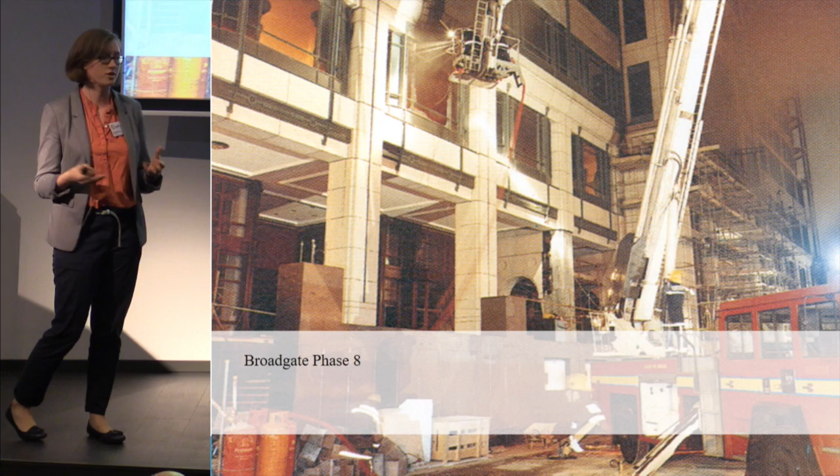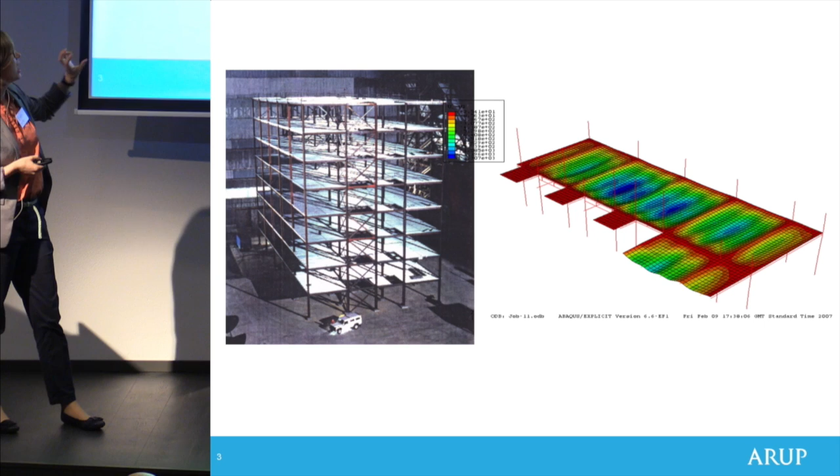That culminated in the Cardington full-scale fire tests, an eight-story steel frame building which they set alight, and used that to actually validate the numerical models and all of the design tools that we have for structural fire research. So when we're doing these very complex models, we've got confidence in them because we've actually done full-scale fire tests to validate that behaviour.

Now, less than a decade later, we realised that there are some really significant inherent weaknesses in the performance of steel structures in fire as well. It's very well with structural fire engineering research to talk about how much stronger things are in fire, but we also need to be mindful of how they can be weaker.

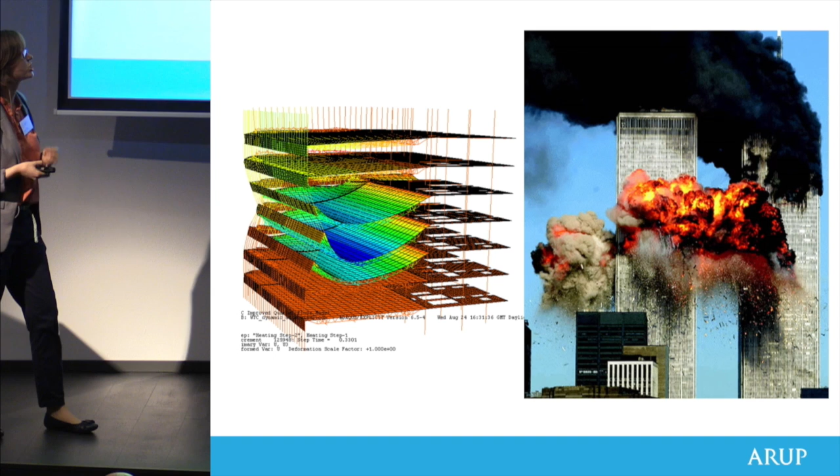A lot of the forensic research done by NIST and other academic institutions really spelt out how vulnerable our tall buildings are if we've got a multi-story fire. As Sean was saying earlier, the thing that stops us from having a multi-story fire is the fire stopping, the quality of our compartmentation construction.

So how much can we rely on that if we're talking about the stability of a tall building in a city centre location? We need to be very sure. There are some buildings that should just never collapse in fire, so when we're doing that design, that's something we need to think about.

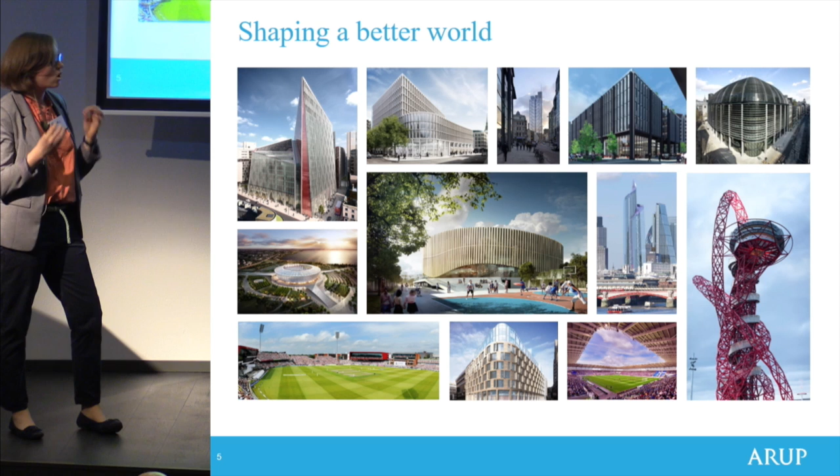The last 20 years has seen a huge amount of research in the very detailed analysis of steel structures, concrete also, and their response to fire. That has given us the ability to design some very complex structures for fire.

But Professor Andy Buchanan probably said it best when he talked about having a consistent level of crudeness. We've developed all this great knowledge about how structures behave in fire, but we're still just using the standard fire to represent the fire hazard. When we're looking at designing a structure for fire, obviously the fire is the single biggest constraint, the major input.

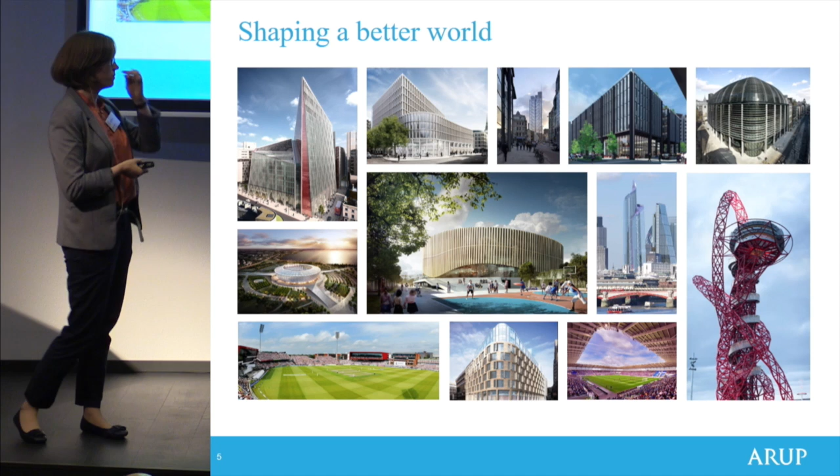So any of our conclusions about how the structure is going to perform are purely based on and limited by the assumptions we make about the design fire. And so we need to develop that knowledge.

A fire, as you're all going to be very familiar with, is a function of the space that it occupies. I think what Sean captured really nicely in his presentation is that these spaces are changing radically. When we started doing fire research in the 1900s, the rooms and spaces we were testing were very different. The acoustic design of buildings and building physics design is becoming much, much better. You can have an open plan 8,000 square meter office, and acoustically that works. So is fire safety going to be the barrier to people building those sorts of things?

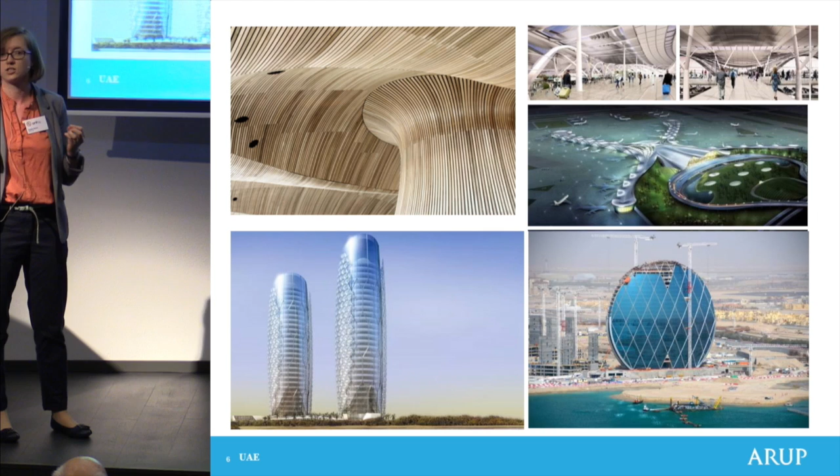We've got much, much bigger spaces. We've got very highly insulating facades. So not only does that pose a risk in terms of fire spread within the building, but how is that going to affect the fire growth? The growth rates that we're assuming for a structural analysis, is that actually the same? I think we'll find that they're actually quite different.

This is obviously the major input to our structural fire analysis. All of this is going to change the way fires behave, and we need to be able to quantify that. So the two challenges we have are about identifying what kind of fire we might have in the building. Is it going to be more like a parametric fire, a travelling fire, an external fire? And then also, crucially, how severe a fire we need to pick. That's probably one of the big challenges for design fires and structural analysis.

In my presentation today, I'm going to talk generally about building fire behaviour and what tools we have as structural fire engineers to characterise that. Then I'll talk about fire severity, how we choose those design fires, and then just a tiny bit about structural response.

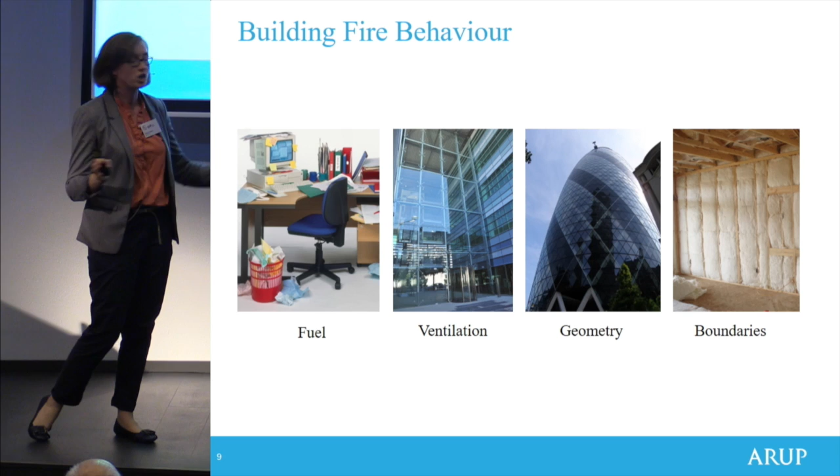So we're mostly talking about fire today. You're all probably very aware of how fires behave, but when we're thinking about it from the structural fire point of view, really we've got four principal parameters: how much fuel we've got, what's the ventilation, the volume and shape of the space, and how insulating our boundaries are.

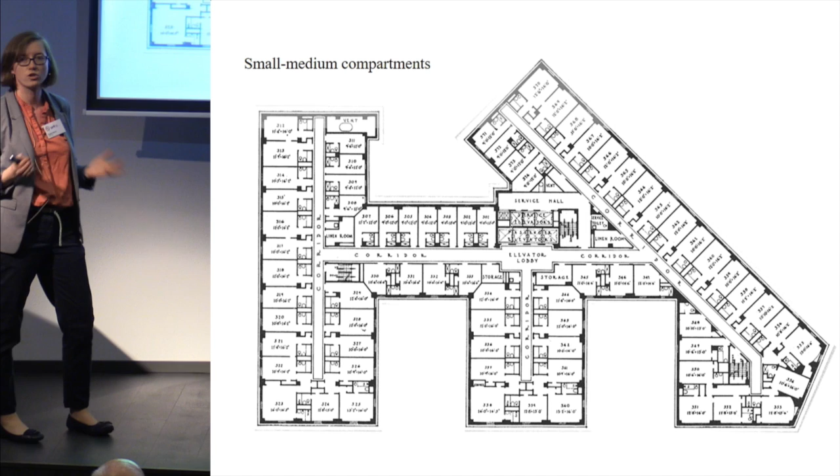If we look at the traditional model, we've got very small to medium-sized compartments, nothing bigger than, say, maybe 150 square meters. These are relatively well understood fires. We've got lots of data about how these burn. We know how varying the ventilation will affect it. We do know that we'll get variation of temperatures within the room, but these aren't really significant for a structure.

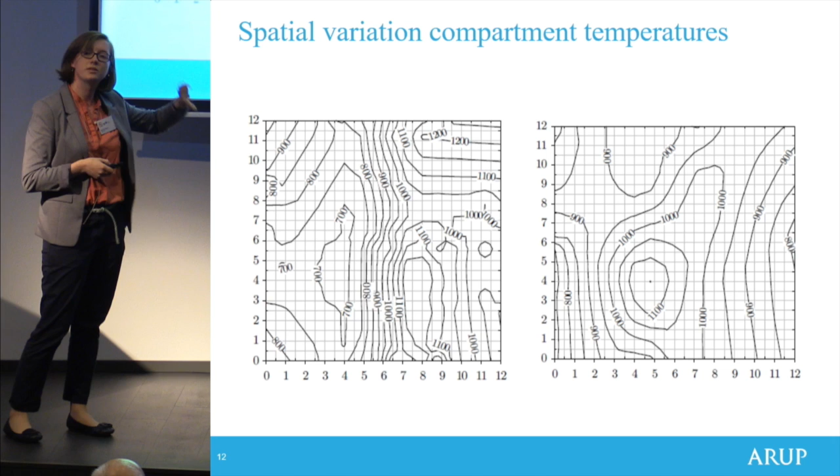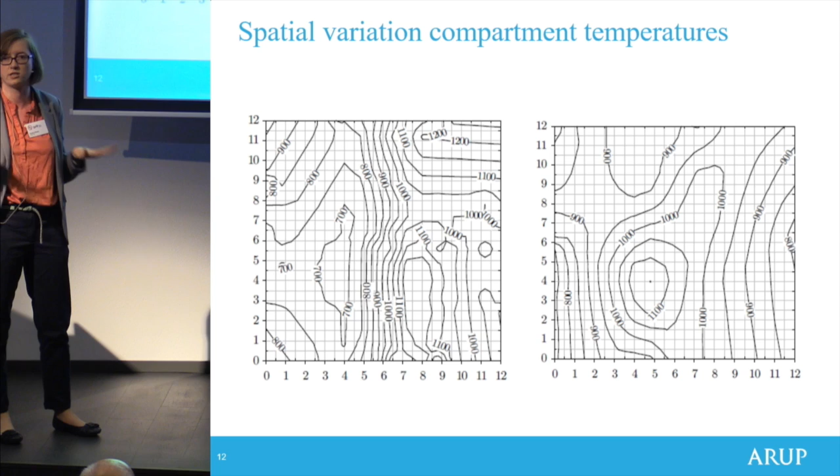If a fire is changing and evolving in matters of seconds and minutes, the structure is much, much slower than that. If the temperature starts to vary by a few hundred degrees over the course of a few minutes or seconds, your steel or concrete structure is just too slow—it's not seeing that variation. So we're able to use a simplifying assumption: a single temperature within the compartment, and that's reasonable. We know how varying the fuel, ventilation, and geometry changes things.

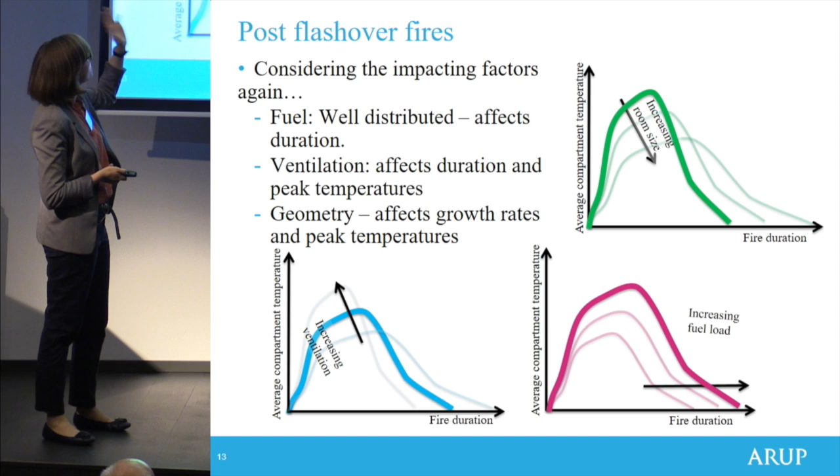We have lots of tools to calculate how that changes the growth rate and duration of the fire, though there are questions around how we determine what those actually are for our building. These models have been developing for a while—we have parametric fires now within the Eurocode, but they're obviously a function of the person who created them.

The fuel load—we probably have quite reasonably good data about what kind of fuel loads we have in our buildings. But how do we define the ventilation? When people present their different parametric fires, they're making assumptions about how much window breakage they're going to have. If we've got a triple glazed facade, how confident are we about how long modern glazing is actually going to last in a fire? We know ventilation is one of the most sensitive parameters. It's actually very difficult as an engineer, and there isn't really any guidance saying you should consider this amount of breakage. So it's very complicated, and people sort of wrap themselves up in knots over that.

And these have all been validated in test compartments up to 150 square meters. If you look in the Eurocode, there is a limit on using this.

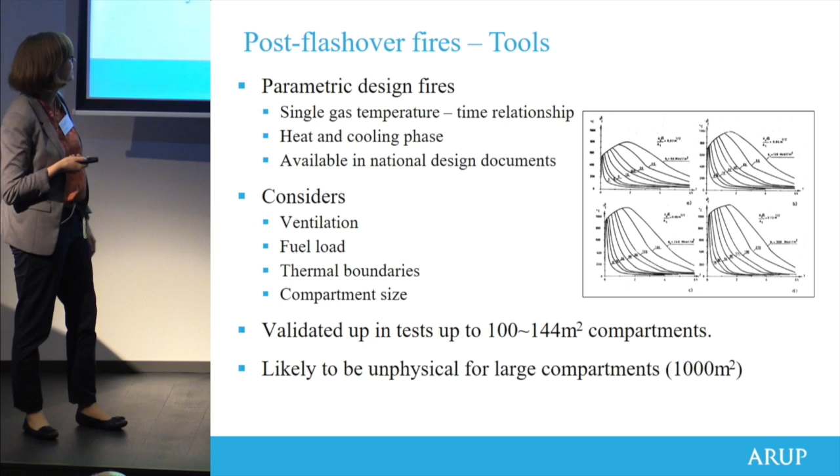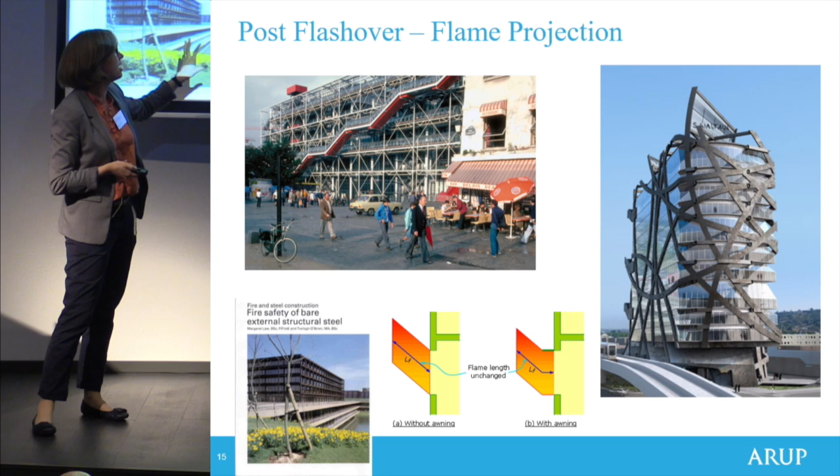Still thinking about flashover compartments, we've got flame projection. A lot of structures like to express the structure, so they want it on the external of the building. This harks back to the Pompidou. When Margaret Law developed her method for the Pompidou, she based it purely on the physics, the compartment fire dynamics. We still use that method today because the physics haven't really changed. It probably needs to be tweaked, but we can make reasonably accurate predictions of the flame projections for a fire within a compartment.

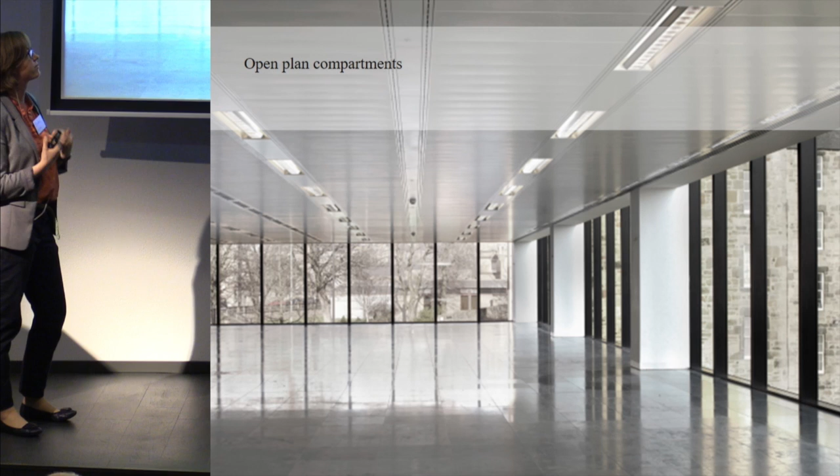When we get to open plan compartments, this is what at ARUP we deal with a lot in terms of commercial buildings. We've got very large open plan floors. Tenants in buildings want interconnected floors; they don't want any separation between them. So we've got this idea of creating vertical villages where you'll have a couple of floors within a multi-story building, and those will all be completely open to each other. Acoustically they can make this work, and from a building comfort level they can make this work, but how's that going to happen in a fire?

We've clearly got a risk of multi-story fires. This probably wasn't a surprise to people, but after the World Trade Center, it was helped by the forensic analyses done about what we call - I'm sure there's lots of different terms for it - travelling fires. So we've got a really large floor plate. What you're more likely to get is just areas burning. You'll have a patch of the floor that's on fire, and then that moves around the floor plate, dictated by where the fuel is and how much ventilation it's getting.

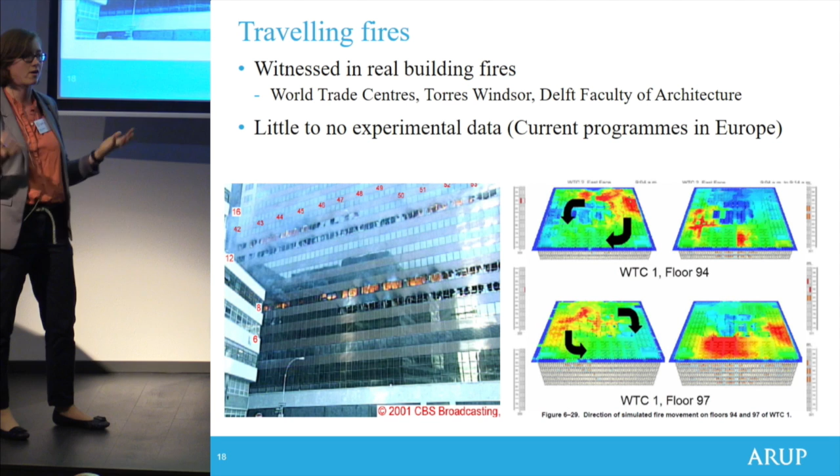From a structural fire point of view, these had always been ignored. Everyone knew that's probably what would happen if you had a really big compartment. But the thought was the temperatures would be much lower, so clearly the standard fire and a parametric fire are much more severe for the structure. So as long as we're designing to those, we're safe. What we saw with World Trade Center and other large building fires is that these fires can go on for hours, like 10, 14 hours. All of a sudden people started to think maybe they can be. That's a lot of preheating to put into your structure. One thing we know about, for example, with concrete structures is that they're much more susceptible to longer, slower fires where there's time for the concrete to heat up. You actually get higher temperatures in the concrete structure in a longer, cooler fire. These are subtleties that start to come out when you have a better understanding of how the structure responds.

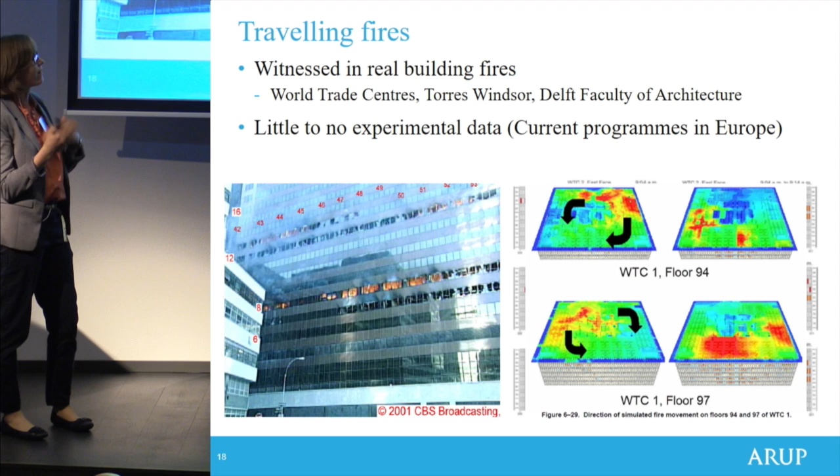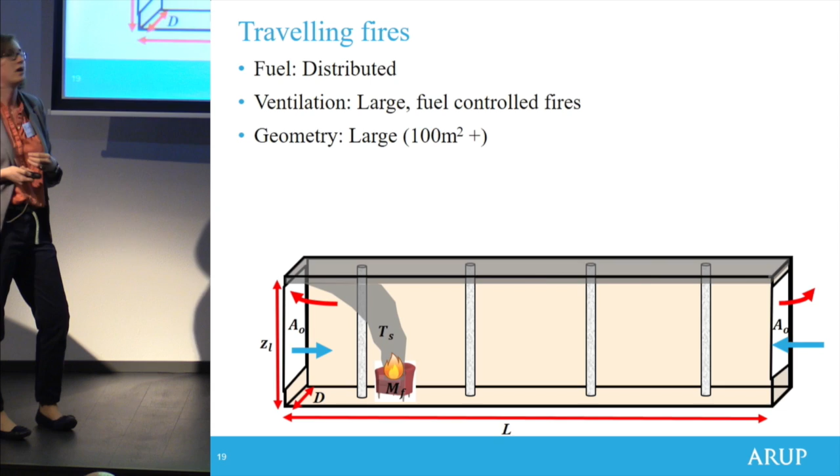So at ARUP we've actually funded some research into how we can go about characterizing this. The way that fire is behaving is very complex - it's a complex fire dynamics problem. But when we think about it from the structural fire side, we're thinking, what are we worried about? We're worried about how long it might heat, probably the main thing. So we developed a very simple model that used Alpert's correlation, where we have our near field, our burning area, and then our far field, our smoke temperature remote from the fire. We move this around the floor to generate that preheating.

Now this is very early stage. There's lots more work that needs to be done in this field. It's a very simple model, but at least it helps us start to get a grasp of how susceptible the structure is to this kind of heating. So if I've got a few hours of cool smoke temperatures, still at 300-400 degrees, and then a pulse of heating as the fire goes past that spot.

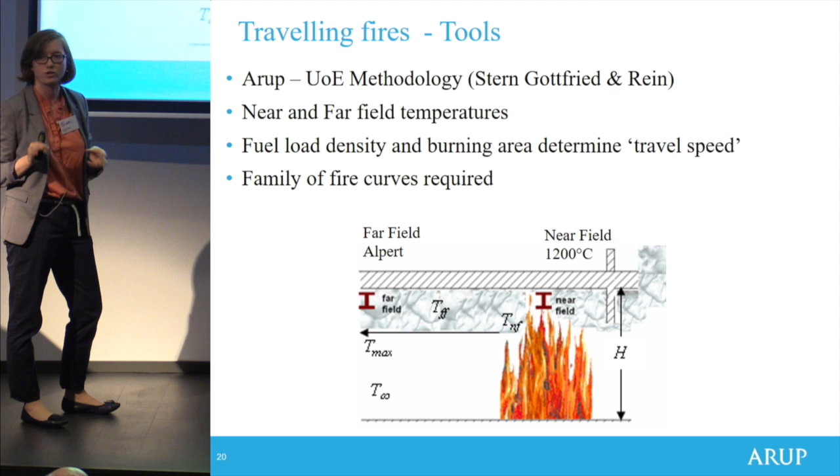And it requires a family of curves. You can't come up with one fire. I think that's the thing we're starting to move away from, trying to define the fire. What we need to be designing our structure to is a family of fires and different types of heating.

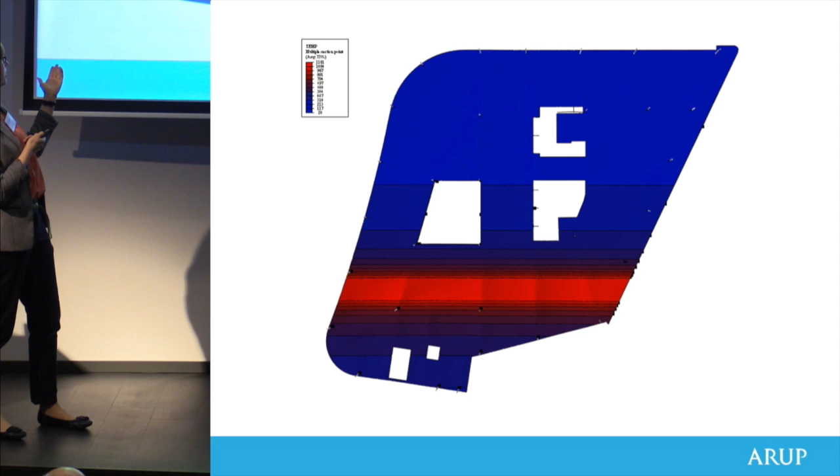And pushing and pulling it to make sure it's resisting all those different heating regimes. So this is just a quick example of how we would put that into a numerical analysis. It's very simple, but at least a start on how that can respond.

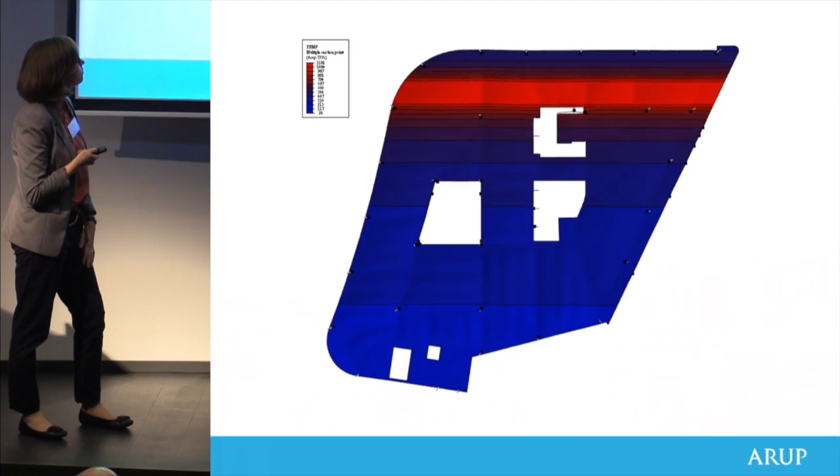Then we get into very large compartments, so transit halls, generally infrastructure types of facilities. We know it's actually very difficult to generate flashover there. We've got isolated fuel sources and very large spaces, so it's hard to create conditions where you might get a flashover fire. But we also have very long-spanning structures, so if I was a structural engineer designing this, I'd have to do a lot of robustness analysis just to make sure the risk of failure isn't a risk for safety.

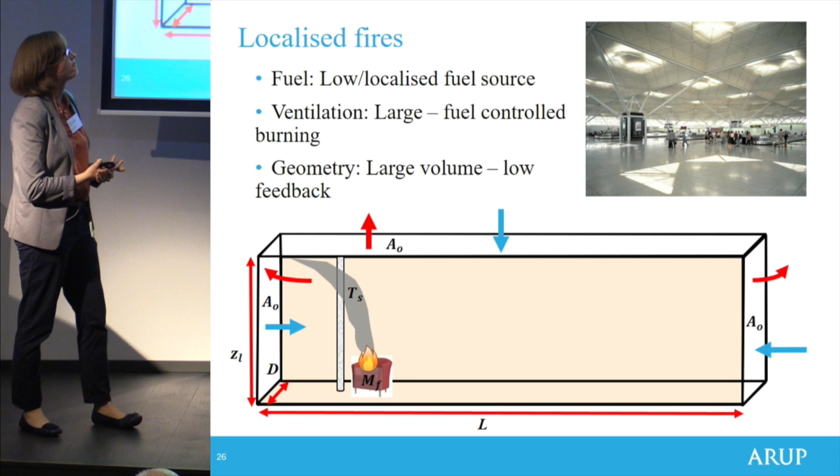And we can do similar things with the fire. So what we might end up doing is saying we don't actually need an awful lot of fire protection because the structure is remote from the fire, but locally to where we have a fire, we can apply fire protection and make sure it's not vulnerable to that.

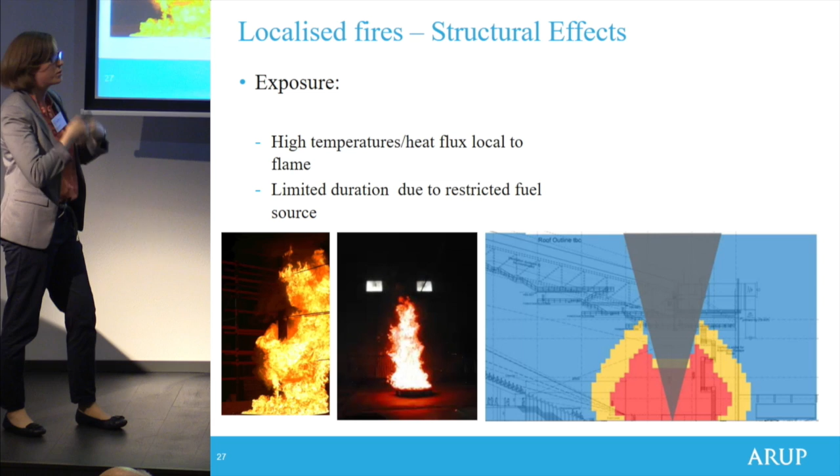So this is just an overview of localized fires. You've got very high temperatures local to the structure, you've got radiation to the structure, so that's what we also need to look at. But the smoke temperatures tend to be much, much lower and not significant for the structure.

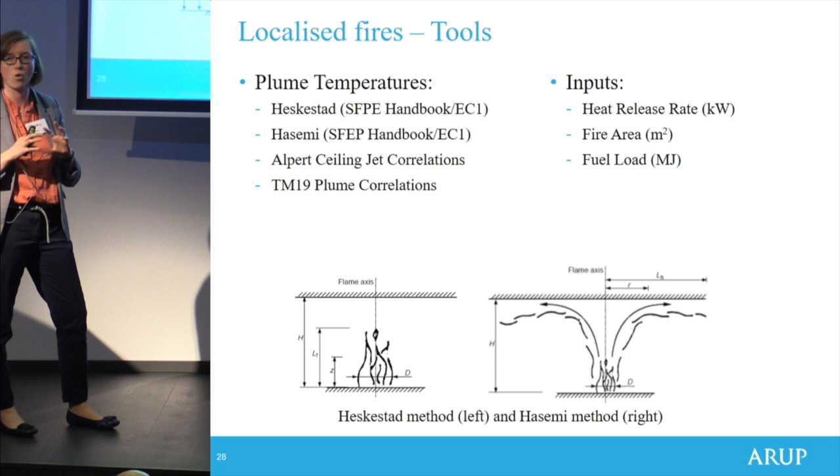And we have design tools within the Eurocode. There's quite a few correlations for free burning fires, as we'd call them. You simply correlate them to heat release rate, fire area and fire load.

So that all sounds very simple, but when you go to actually define what it might be, if it's an entertainment arena, it's very difficult because they want it to be a very flexible space, so it's hard to define what the fire load is. And sometimes getting fire data for the kinds of things you know are going to be in there is difficult too.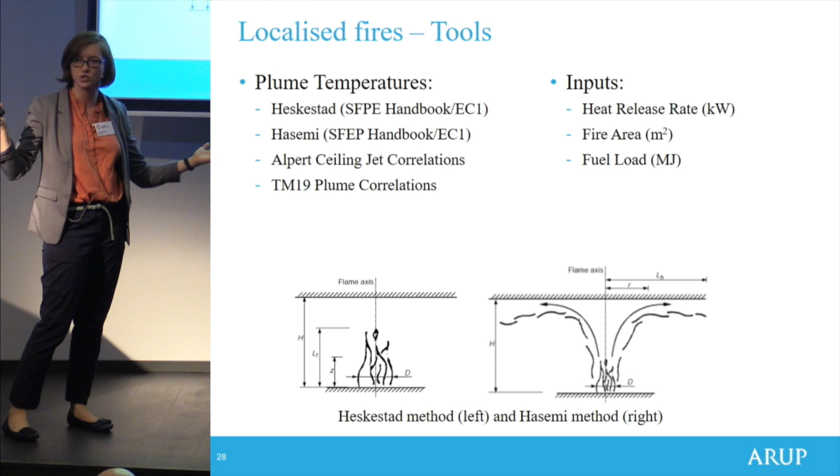So if we were looking at a stadium, we might have those large projection screens. Not many people have burnt those, so we don't really know the heat release data for them. We're trying to make estimates from things that we have burned, but generally people only let you burn old cars and things like that. So we need to think about that as well.

And then combustible construction. Everything I have just said is about non-combustible construction. So all of the data we have about parametric fires, about travelling fires, that's all based on structure that is not contributing to the potential fuel load for the fire.

For timber structures, we know we're able to define what the charring rates are, but those are all based on furnace tests, and how that would actually be replicated in a real building, nobody really is sure. Because we've always built timber in lower rise construction, it's perhaps less critical for structural stability, though that's still an issue.

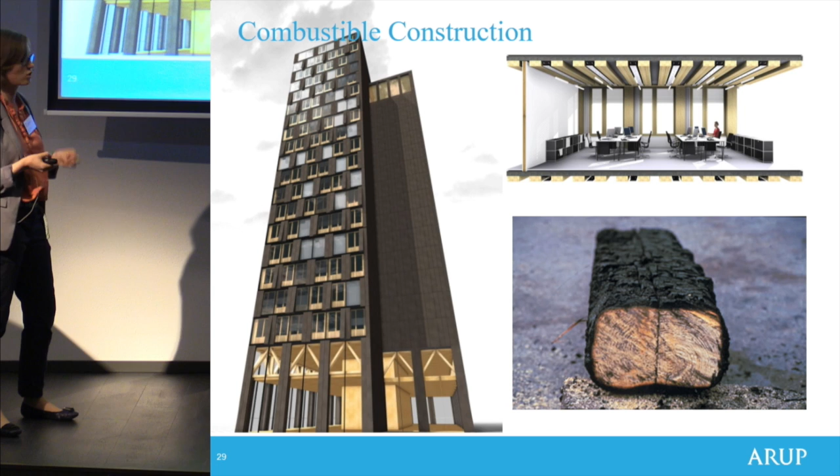So when we get into tall buildings, your entire fire strategy is based around the fact that you can survive burnout. That's what we tend to use as our benchmark if we're doing a structural fire analysis. You need to be able to withstand the fire, and then the fire extinguishes, because the consequence of structural failure is so much higher. So there's a really big challenge for structural fire engineering, if we want to enable this type of tall construction: how can we quantify the fire severity in a timber building?

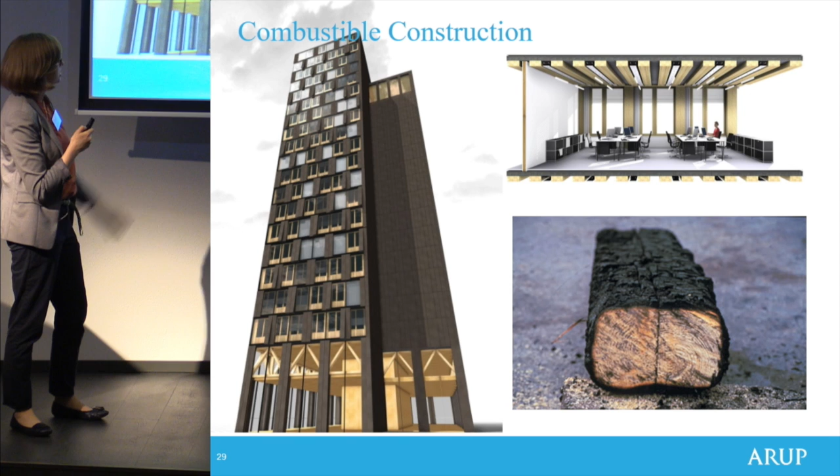And so we're funding some research at Edinburgh University, but I know it's something that's been studied the world over, both in the US, Australia, everywhere where people are trying to build taller and taller.

So those are the different types of fires that we can have. How do we choose our fire? How do we choose which one we're going to use? And how do we choose the severity?

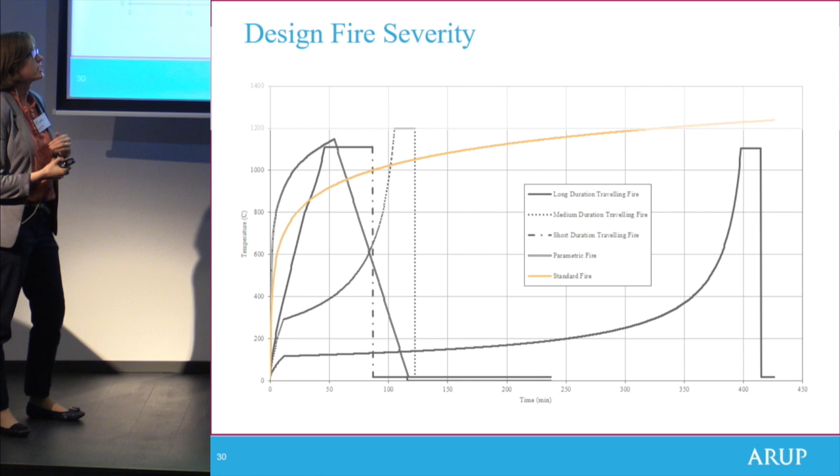As I've talked through the different methods, there's quite a lot of user input and uncertainty that goes with those, and there isn't really a best practice guide on, if you're going to use a parametric fire, this is the amount of ventilation you should use. So one consultant might produce a different parametric fire to another, with different fire severities, meaning we're not designing all structures to a consistent standard. That's a real challenge.

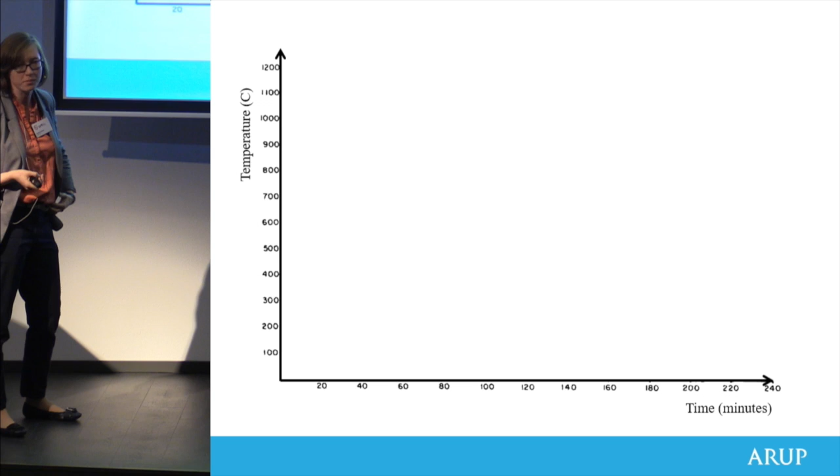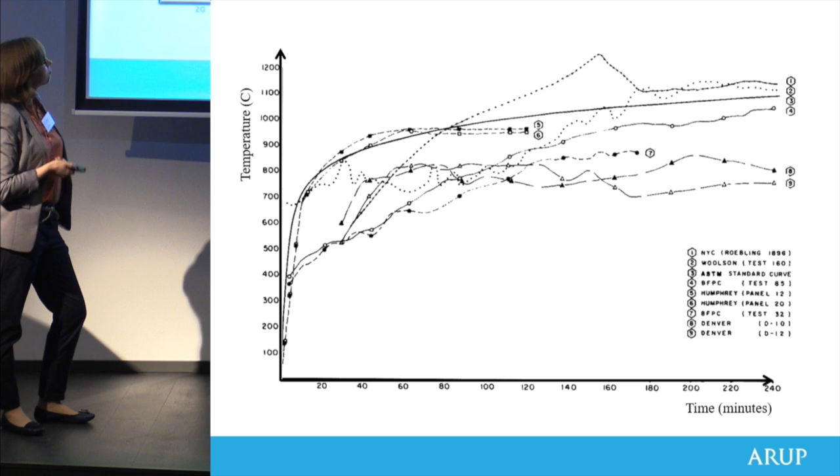So before talking about that, I'll give a quick background on prescriptive fire severity and what that means. In the early 1900s, people wanted to know how hot a fire is. They ran a bunch of fire tests and found a reasonable correlation for roughly how hot a fire is, giving us the ASTM E119 curve, which is effectively the same as the ISO curve. It says that in a compartment fire you're at about 900, 1100, 1200 degrees.

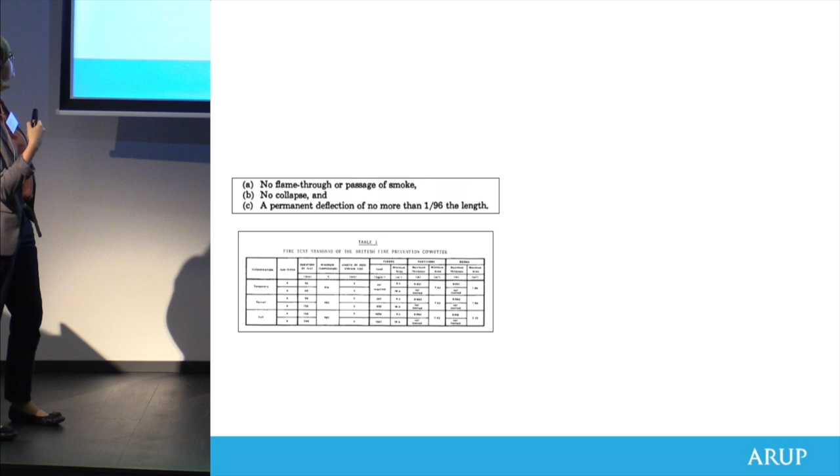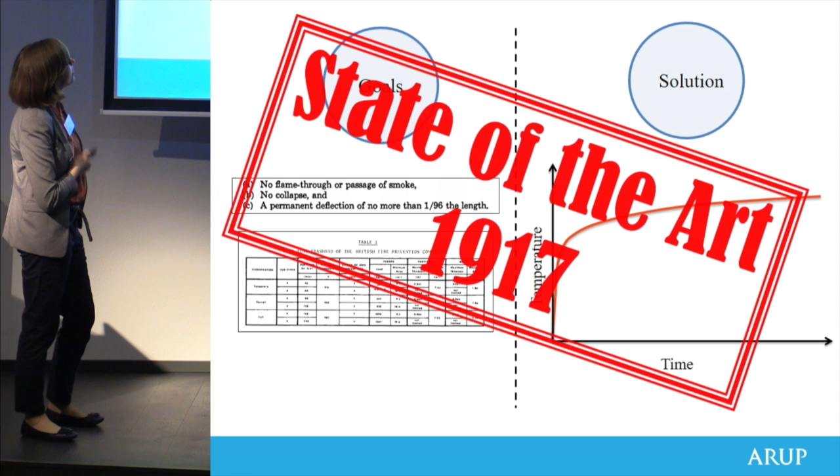Then we said we need to set some performance requirements for the structure: it should remain stable, it shouldn't let heat and smoke pass through, and it shouldn't deflect too much because then it'll break our furnace and we don't want that. So we set some goals and tested against a standard fire, which was pretty much the state of the art in 1917. That's how we designed our structures.

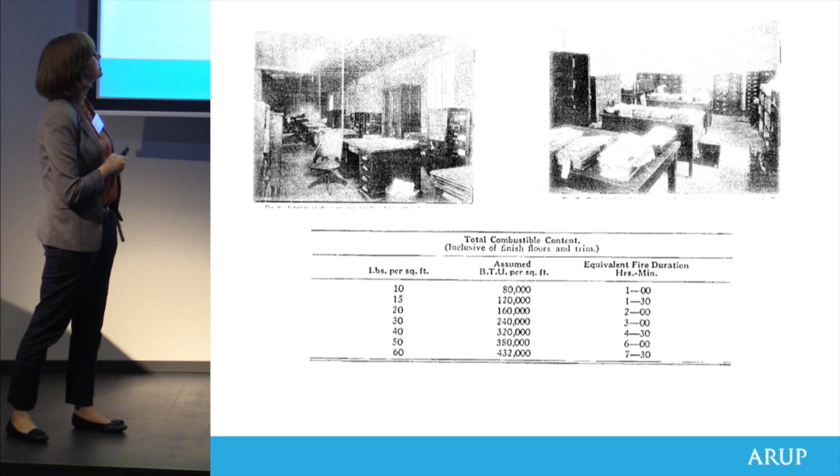Then Ingberg came along and said not all fires are equal. A retail fire will be different to an office fire, and he surmised that was because there were different amounts of fuel available in those spaces, which is absolutely true. So he did lots of surveys as to how much fuel was in these different buildings.

We know now that's not true, but it was actually quite a forward-thinking approach at the time. It also set the benchmark. So if he did his office fire and said that's about 60 minutes, that's why our office prescriptive requirements now need 60 minutes fire resistance. It all goes back to this work that was done.

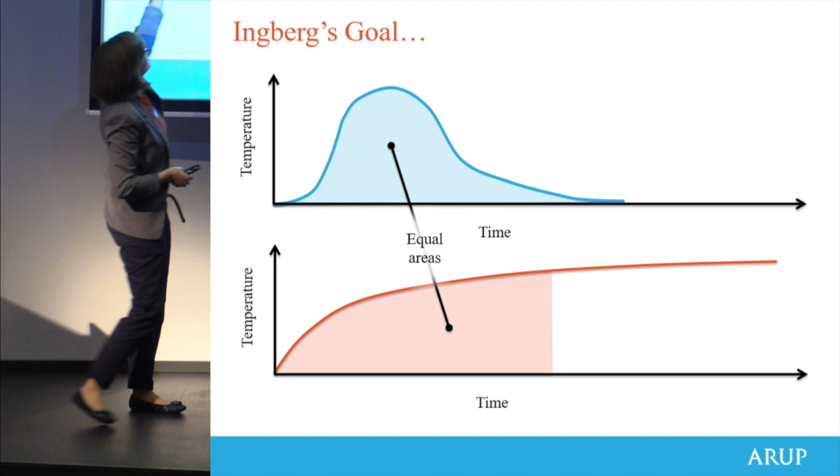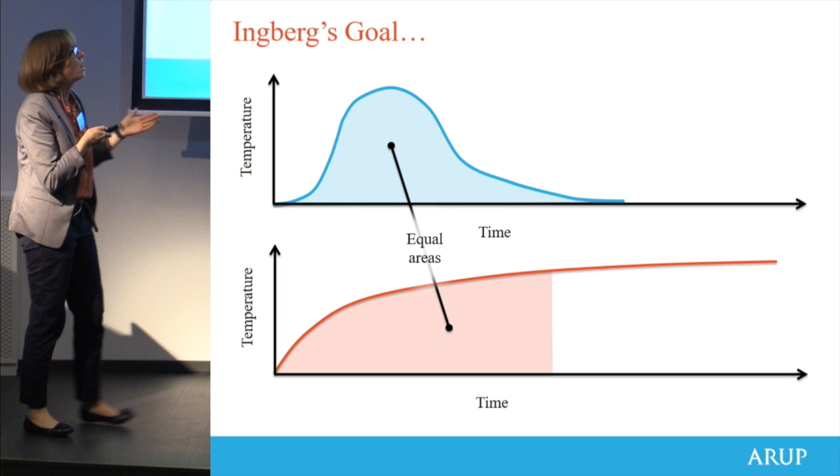So if you think about the performance he was actually setting behind that, it's where we're saying you need to withstand burnout. That was the performance requirement, and that's what underpins our prescriptive requirements. So when thinking about a performance-based design, if we can design it to that burnout, we'll be demonstrating equivalence. That's what we need to do with a structural fire engineering design. Our goal is about withstanding burnout.

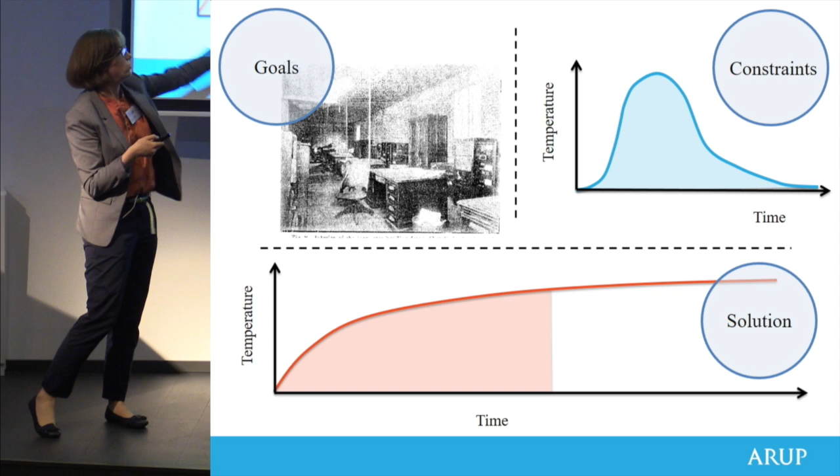As I was saying, there's quite a bit of variation, and it becomes a very subjective decision that somebody needs to make about how severe to make a fire. We can talk about engineering judgment all we want to, but we kind of want a consistent standard.

So in the mid-2000s, they developed a code of practice in the UK called BS 9999. What this tried to do was bring the things we've learnt through fire safety engineering into a code of practice. It looked at fire resistance periods and said we need to revisit these because we know ventilation has a big effect, and we know introducing suppression into the building reduces the likelihood of a severe fire. But how are we going to do that?

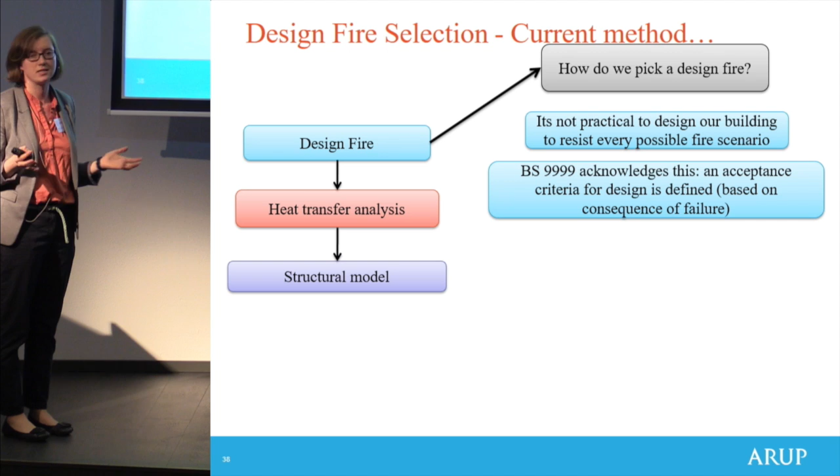They came up with a risk-based methodology. They said we need to define the acceptance criteria for design. So how they did that was, the risk should be constant for all different buildings, but the consequences of their failure are different. So if I have a single-story building, the consequences of that failing are very different to the Burj Khalifa, which is nearly a kilometre tall, failing.

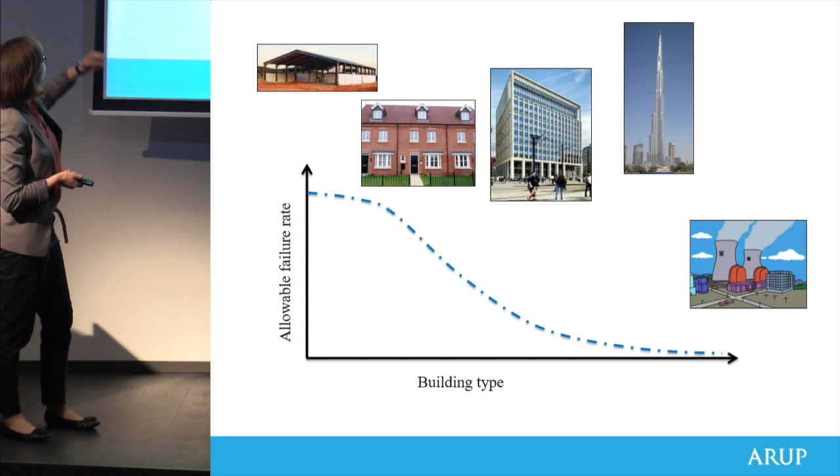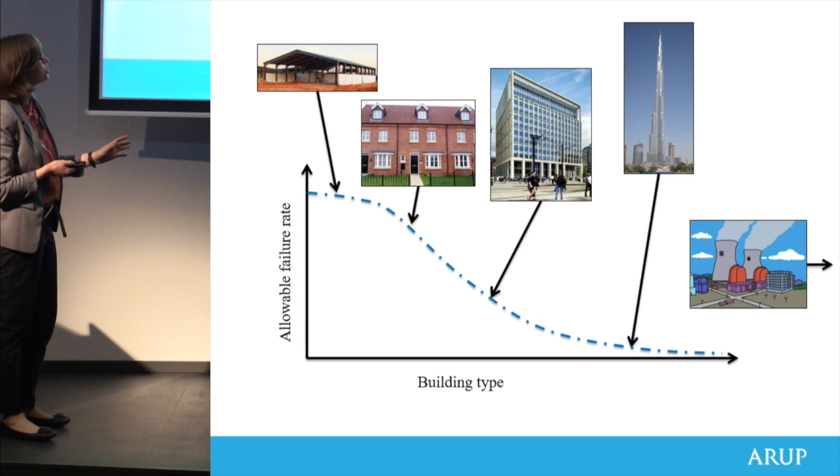We control risk by setting the allowable failure rate. We're quite happy to let single-story sheds in the middle of nowhere collapse, but we're not happy to let the Burj Khalifa or a nuclear power station collapse. For a very high consequence failure, we want a very low failure rate, and for a very low consequence failure, we can accept a high failure rate. That gives us a consistent level of risk across our buildings.

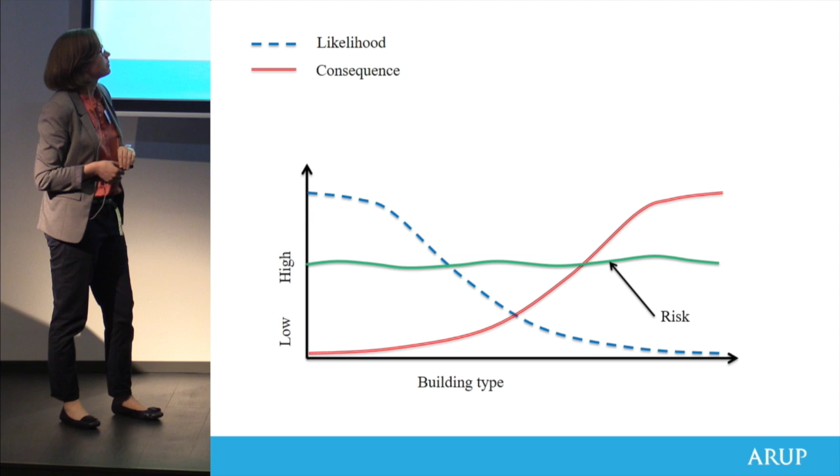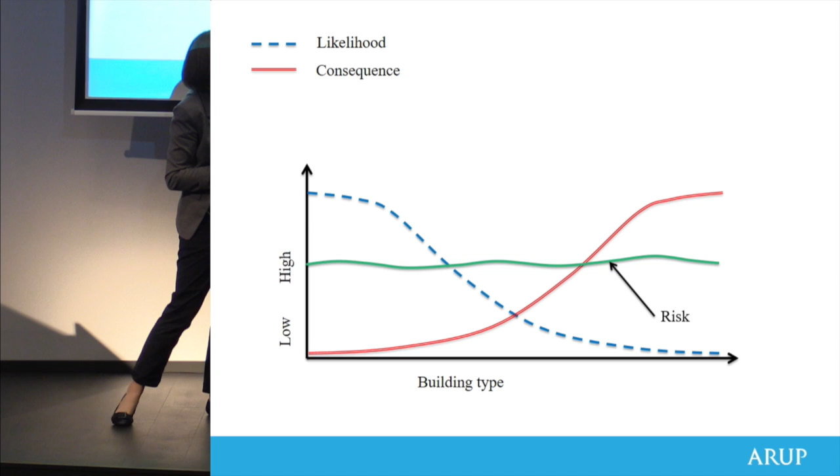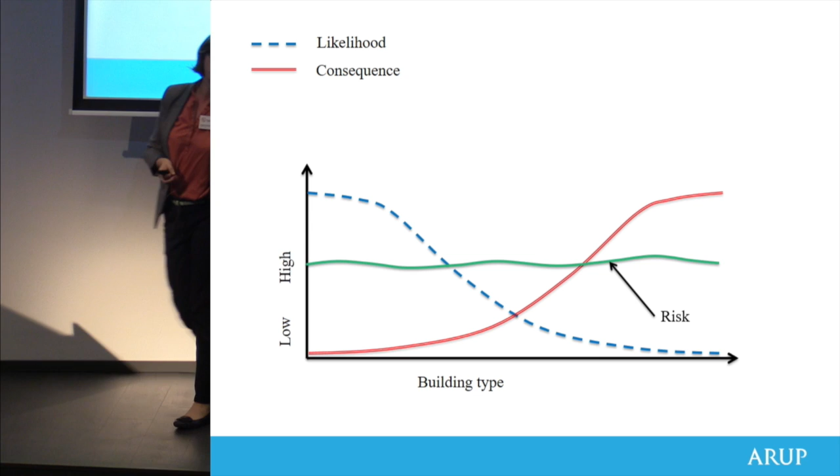That's what you'll find in prescriptive design. Your single-story building might not need any fire resistance, but your tall building might need 2 or 3 hours, depending on where you are in the world. The people who wrote BS 9999 defined that risk level for the UK, because this risk level is about society accepting the risk. They defined what that risk level was for UK building stock. As a designer, if I know the building I'm designing, I can work out the consequences of structural failure, then work out the allowable failure rate, and use that to choose the severity of my design fire.

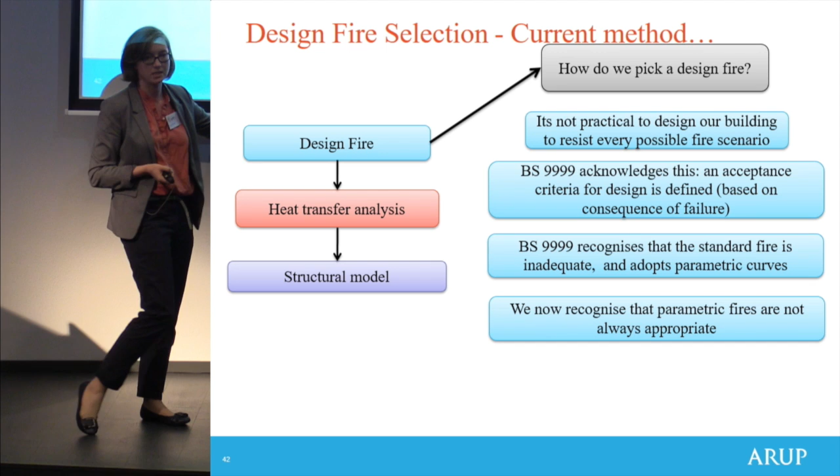When they did this work, they developed the methodology, put some fire resistance periods in the code, and adopted parametric fire curves explicitly into that. Now we know from what I've been talking about previously that parametric fires are not always appropriate — we should also be including traveling fires. This risk-based method, when we do it explicitly, lets us do that.

So I'll give you a quick explanation of how we do it. We start by asking: what are the inputs for our design fire? We've got our geometry, fuel load, and fire size.

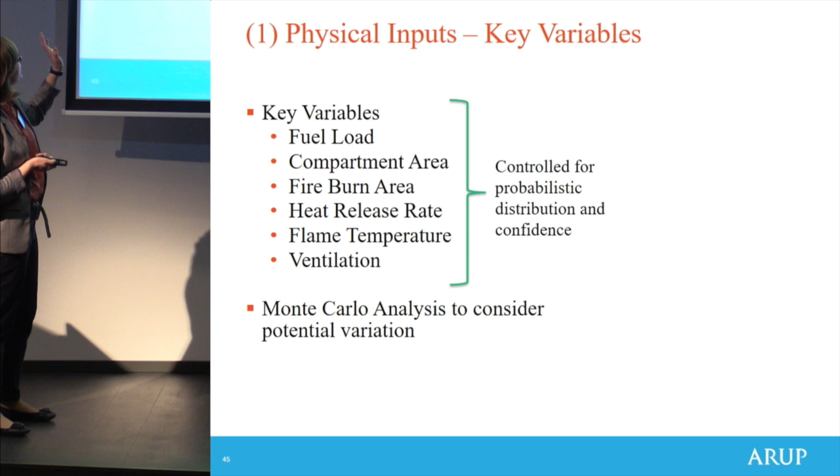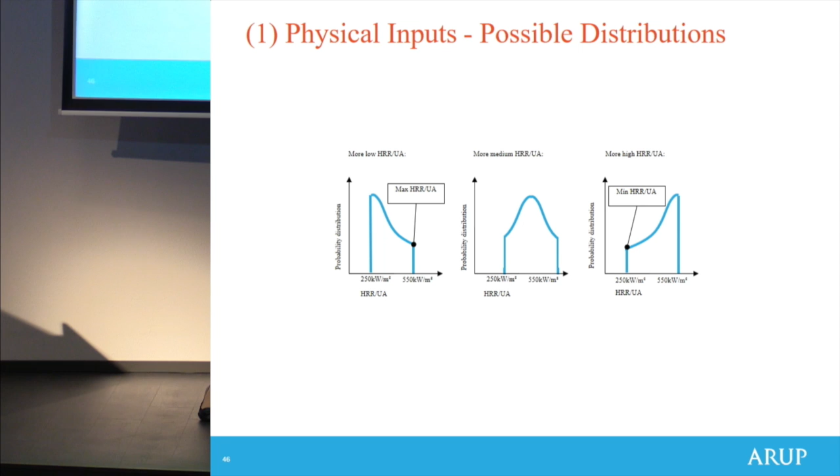We take all these inputs and create a probability distribution curve. Talking about fuel load, for example, since we have lots of data on that, I can say the fuel load will be somewhere between X and Y, and it'll vary in some fashion between the two. If I think it's more likely I've got the higher end of the fuel load range, I can skew the results that direction, or if more likely towards the low end, I skew them the opposite way.

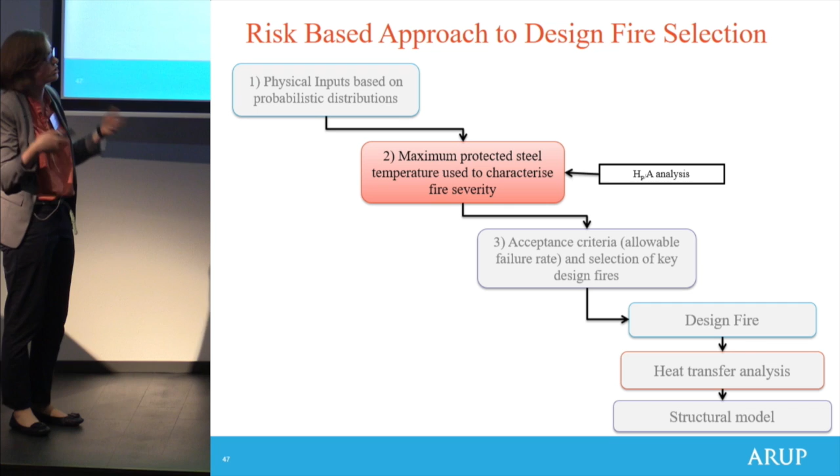When I run through, I calculate maybe about 10,000 different design fires. For each input, I have these curves and randomly sample them to produce basically all the possible design fires you might have. So I get many thousands of design fires. For each of those, I calculate the maximum protected steel temperature, because I'm trying to compare severity — it lets me rank the fires. One fire might only produce 300 in the structure, and another might produce 600.

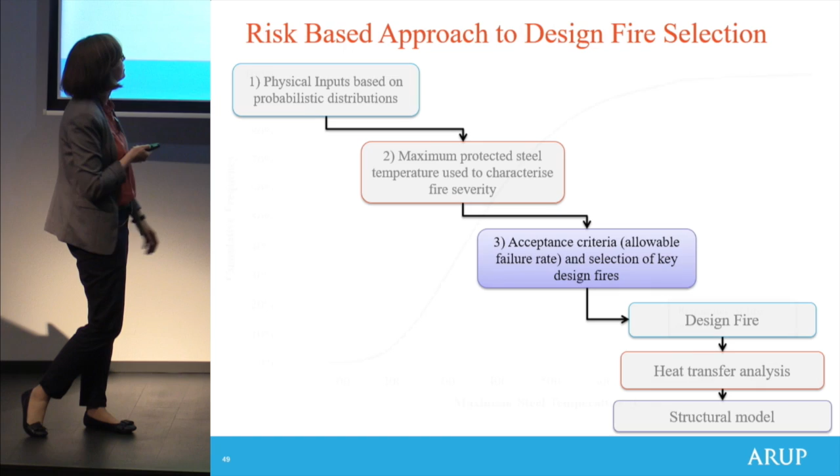Then I set my acceptance criteria — what's the allowable failure rate? I've got a graph that shows this better. This line is actually thousands and thousands of little dots representing all the temperatures, ranked by severity of all my different fires. I've got some very severe fires at the end where I'm getting temperatures of about 1,000 degrees, even in a protected structure.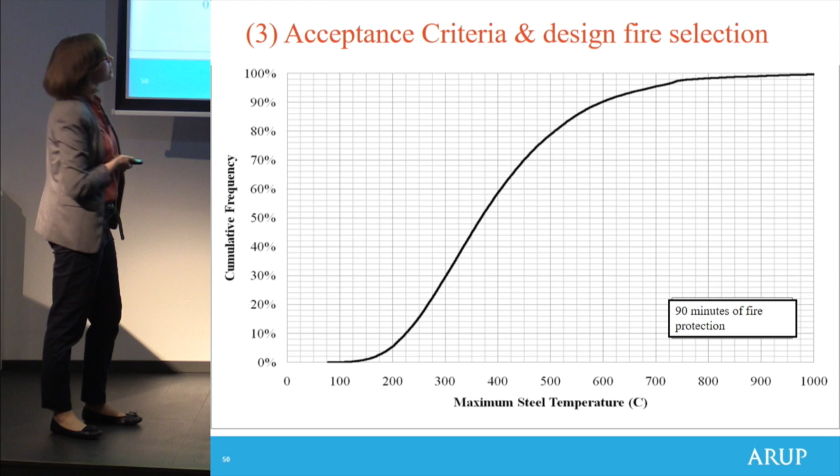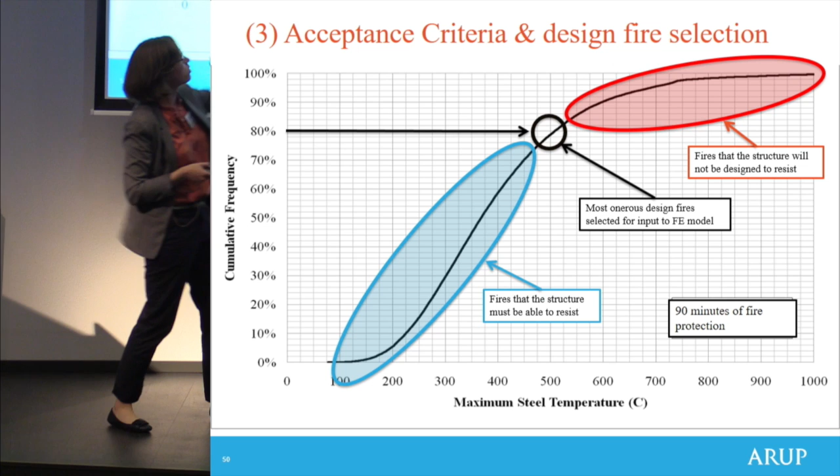I can say, okay, what's my allowable failure rate? If you look at a less than 18 meter office building, you've got about 60 minutes fire resistance, which is about 80% performance — so the allowable failure rate is about 20%. If I pick that as my design fire, I'm effectively designing for all the fires in the blue area, and discounting the fires in the red area as too severe for the structure. If one of those red fires occurs, it's very low likelihood, and more severe than the structural fire protection is designed for, but it's still in line with prescriptive requirements.

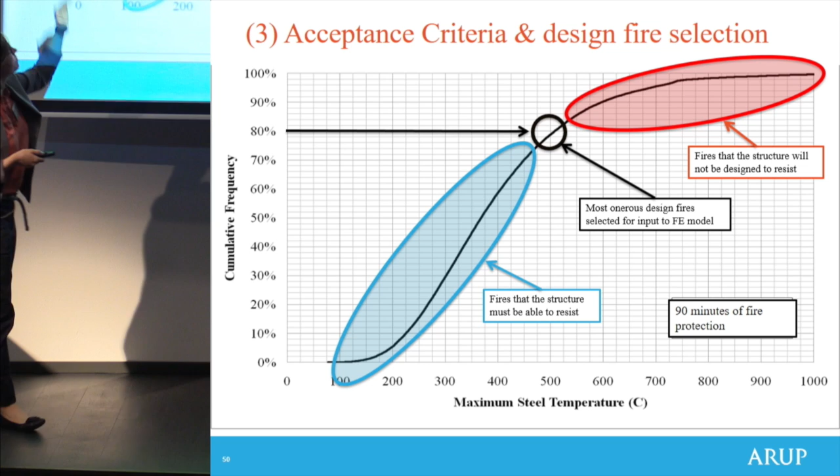So the taller my building gets, the higher that percentage gets. When I'm up to 150 meters, I'm actually talking about 90%, 95%.

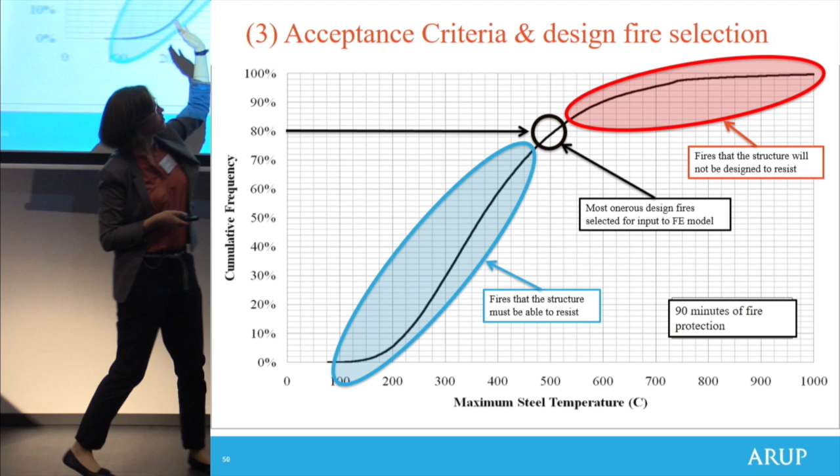And because of the shape of the curve, if you go from 90 to 95, it's actually a very big increase in fire severity. So that's how I choose my design fires.

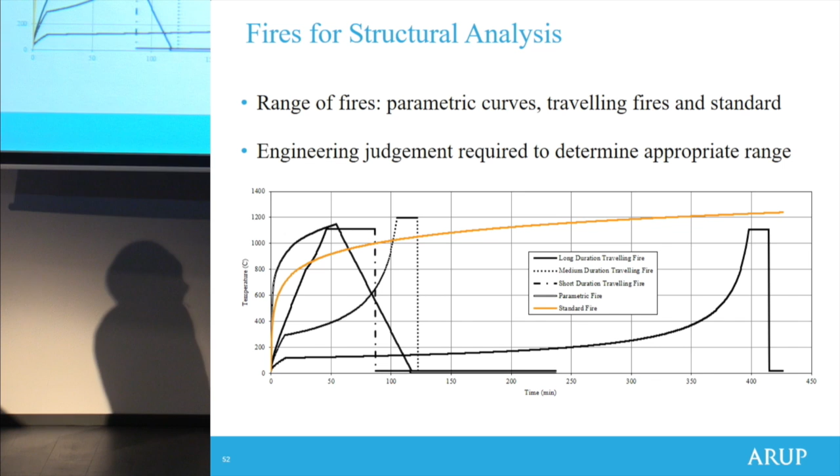So I can zoom in on that line, and what I've actually got is all these individual temperatures. Each one of them is a design fire, and I can pull out those different design fires. In there I've got parametric fires, traveling fires, lots of different fire behavior. Now they've all got the same severity - they all cause the same temperature in the structure.

But we know, because of all the research we've done into structural fire behavior, that sometimes a traveling fire can be worse, sometimes a parametric fire. They do different things because of the different heating and cooling rates. So it's very important that we choose an envelope of fire behavior - we need to look at different types of fires.

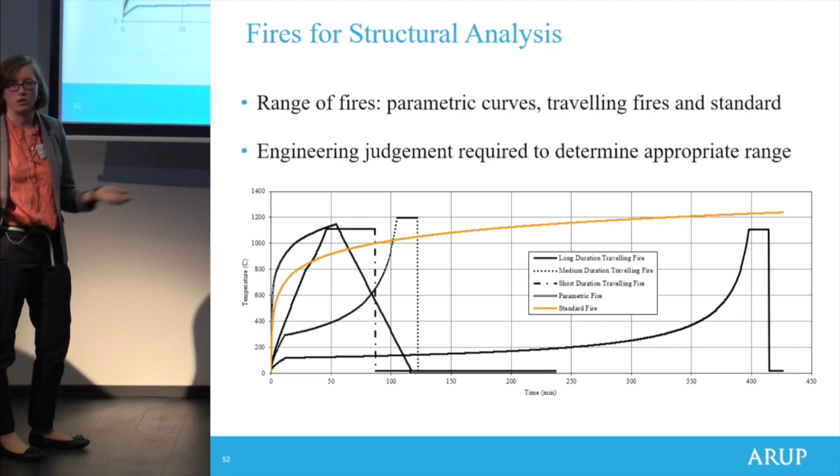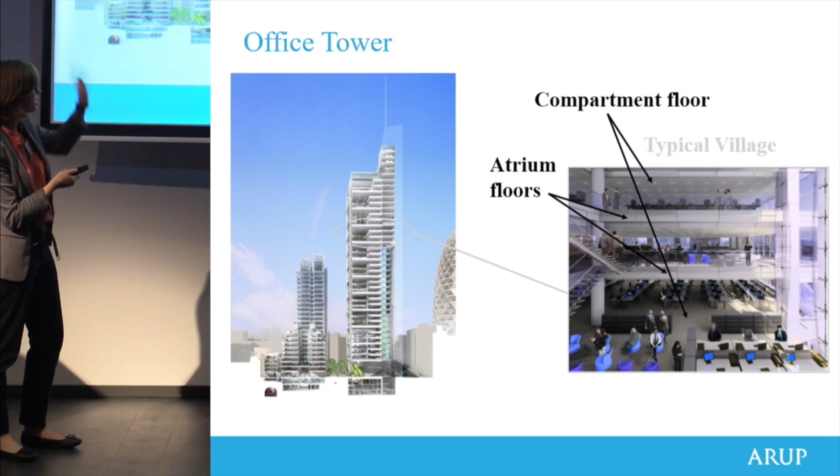Just a few examples of that - we know, again in multi-story fires, this comes back to the vertical villages we were talking about before, that if we're looking at fire behavior under multi-floor fire, that's very important. What it's mostly important for is the perimeter columns. Where we've got a multi-floor fire, we can actually end up pulling in on those columns, and that can create a global collapse mechanism.

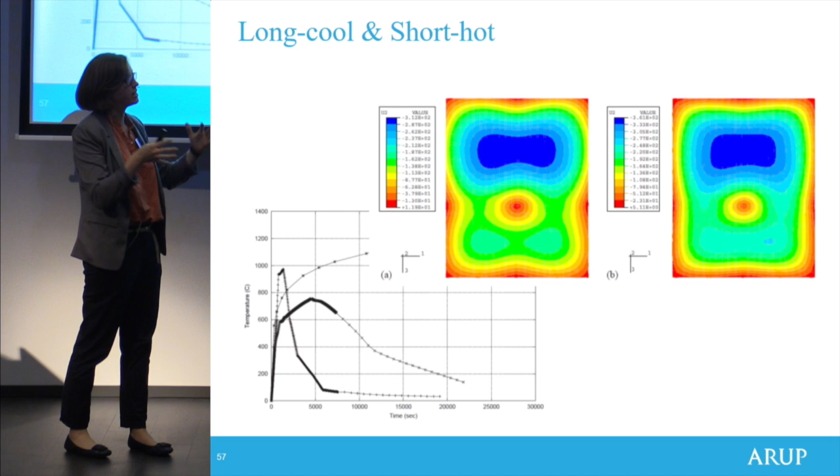When I'm looking at parametric fires, I need to look at short hot and long cool fires, that's what we call them, because they elicit different behavior. A short hot fire is very fast - you get steep thermal gradients generated in the structure, so you get lots of deflection because you've got lots of bowing. But if I look at a long cool fire, I get much higher temperatures generally overall, so I get lots of thermal expansion. The structure's behaving differently under each one, and you cannot categorically say for all structures which one's worse.

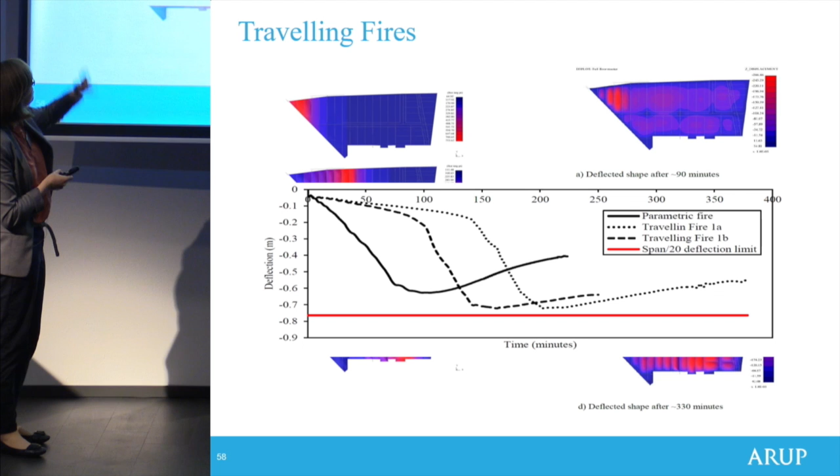So we need to check both of them. And then when I look at my traveling fires, what I find is, and I've just compared here where we've done parametric fire calculations to our traveling fires, we get much bigger deflections under the traveling fires. That's important for how the slab is performing - if it's deflecting a lot, then we're very worried about how those strains are being balanced through the supports.

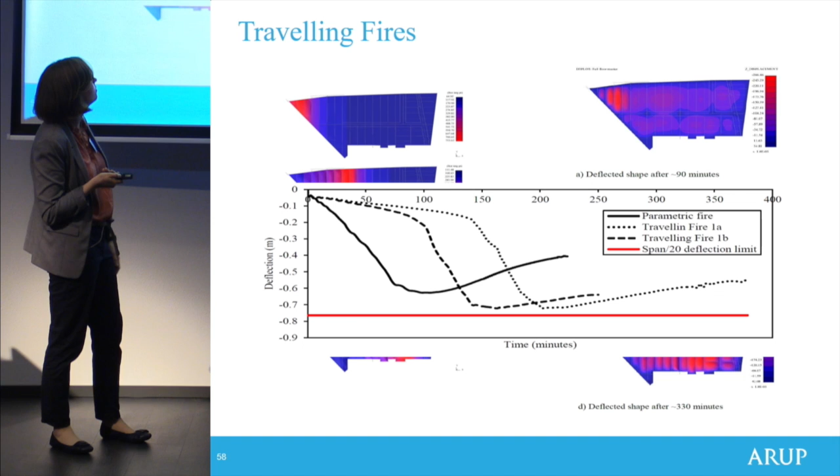So in principle, what I'm saying is we need to have an envelope of behavior. Someone who comes with just a single design fire, I would generally treat with caution and say, well, have you thought about how the variation in all your different input parameters will affect that design fire? Because you can't choose an absolute one.

And so in conclusion, I think I'm reasonably on time. I think our building structures and fire hazard - people talk about buildings becoming more complex, and they talk about it structurally, but actually they're becoming much more complex from a fire point of view as well. So we need to keep pace with that.

Increasingly what we find through some of our performance-based designs is that there are things that prescriptive design would have missed. It makes assumptions about how structures behave, but because the load paths we're using are getting very complex, they weren't thought about when they were writing prescriptive design.

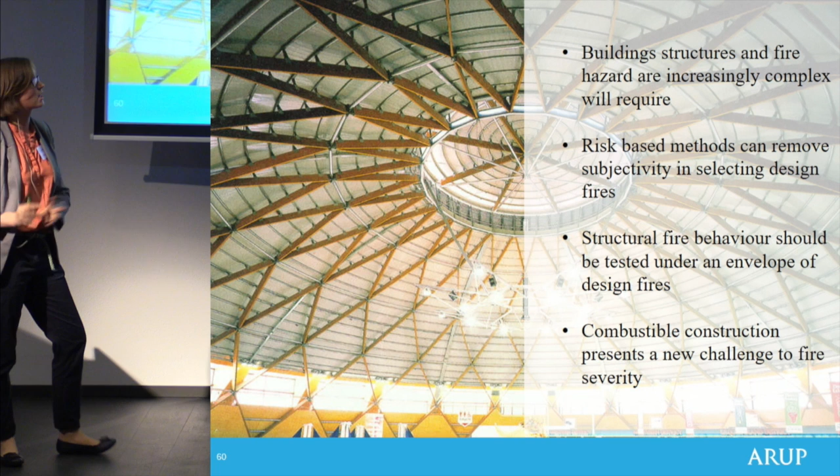Risk-based methods can be very useful in removing the subjectivity that goes into selecting design fires, and it creates a consistent standard, so we're all choosing design fires to achieve the same standard, and that's very important - just generally that we know that just because something has been fire engineered, it's still the same level of risk as if we designed it prescriptively.

We use an envelope of design fires so that we can push and pull the structure in lots of different ways. And I think in terms of defining fire severity, one of the biggest challenges we have is quantifying for combustible construction. I think that's a key thing we need to do before we start building at increasing heights in timber.

So that's me. Thank you.

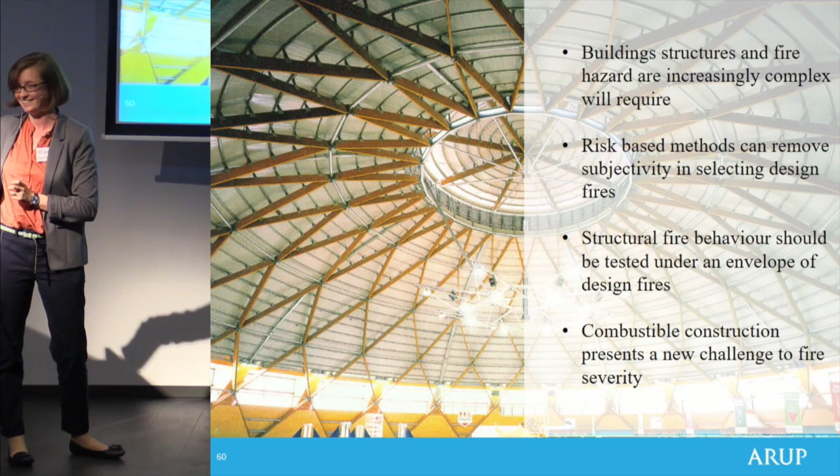Okay, thanks. Thanks. Okay, Susan. Yeah, thanks. You can stay here. Oh, no, you can stay some too. Oh, okay. No, thanks for leading us into your conceptual approach about fire safety engineering.